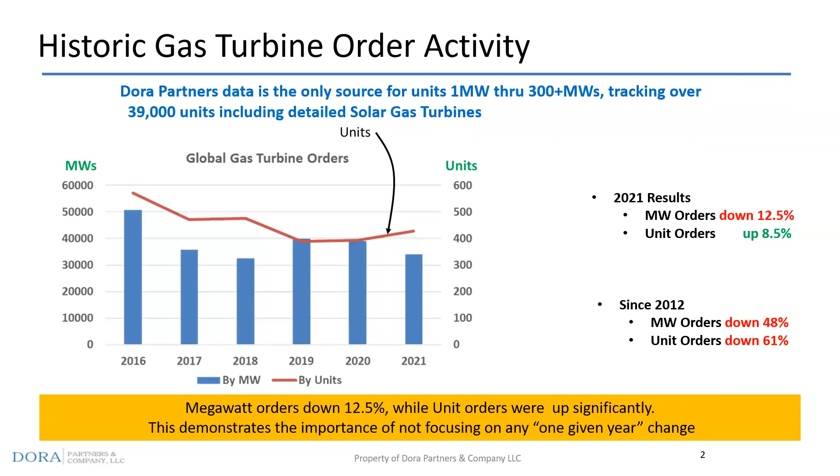I always think it's important to see which engines have had the most success, and it goes without saying that the LM2500 Plus continues to be the strongest gas turbine in the aeroderivative world and has been for a very long time. The LM2500 Plus has captured 33.3% of the market over the last 5 years, including Russian engines. A very strong gas turbine in the marketplace, with a compound annual growth rate of about 3.1% over that 5-year period. There are other engines that have done reasonably well, but I just wanted to highlight that.

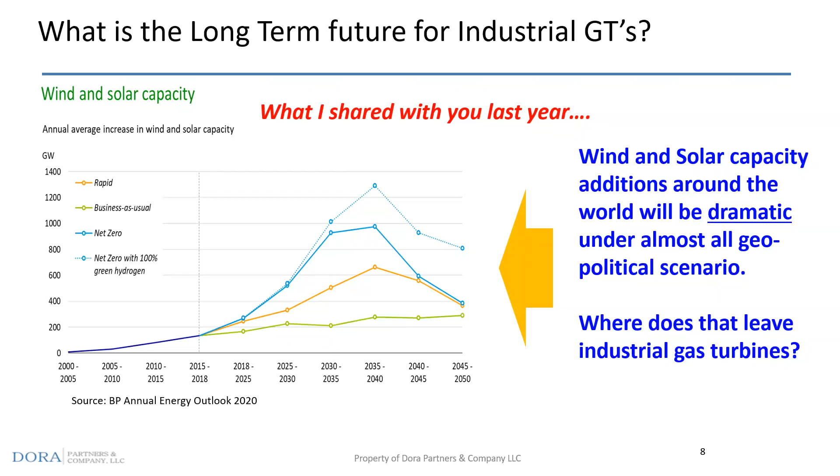So where is it? Hydrogen, in my opinion, is what I call the other natural gas. Now, is it a market that's going to grow rapidly? Absolutely not. Is it going to overwhelm the world over the next 10 years? Absolutely not. Fossil fuels will play a strong role for the next 10 to 15 years, without a doubt. But there are underlying activities that are very strong in terms of the utilization of hydrogen as a fuel.

You can see that the amount of electrolyzer installations planned or announced, converting water to hydrogen, represents a huge amount of activity around the world over the next 10 years. And if you look at factual activity, there's already 389 hydrogen development projects under construction, and another 489 projects in the feasibility or concept stage.

And 50 of the projects anticipate using ammonia as the final fuel selected. So it would be very unwise - and I know all of the gas turbine OEMs in the world are looking hard at the use of hydrogen and ammonia as a fuel. Maybe not for tomorrow, but over the long run, it would be very unwise to dismiss hydrogen. Obviously there are a lot of challenges over the next 25 years to get from point A to point B in terms of its utilization.

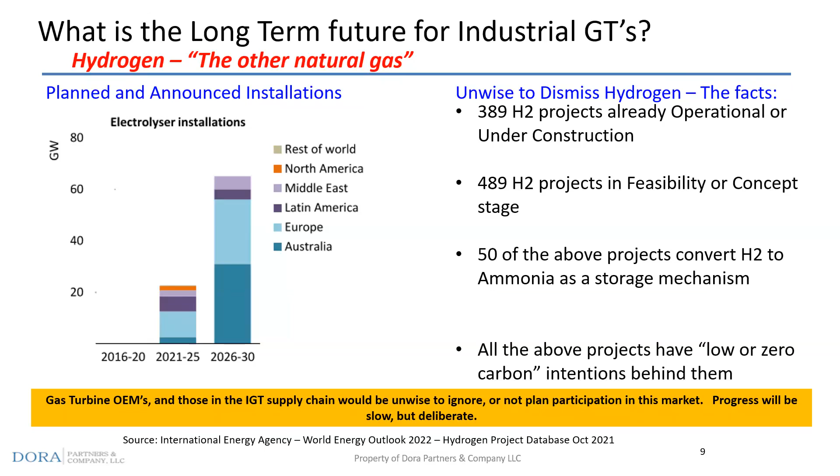So in summary, orders for gas turbines on a quantity basis were up, but down on megawatts. Aeroderivatives and small gas turbines did reasonably well, but I expect megawatt recovery will be coming in the next year and the coming years. The GE Baker Hughes team maintains a strong aeroderivative market share with the LM2500 Plus as one of the most popular gas turbine models ever manufactured.

LM6000 recovered its presence in 2021 despite very strong popularity of the Siemens SGT 800. The LM9000 has good long-term potential, but we're unsure what will be happening given the current conditions in Russia.

Long-term order activity is down, but there is long-term potential for gas turbines with fossil fuels and with hydrogen, ammonia, and methanol. And I believe those three fuels will be key to extending gas turbine life long after Mark and I are gone.

Renewable energy capacity additions will be dramatic over the next 20 to 30 years under almost any foreseeable scenario, and gas turbines will have a role to play. LNG expansion and a shorter term response to fossil fuel dependence on Russia may also improve gas turbine activity in the next 1 to 5 years.

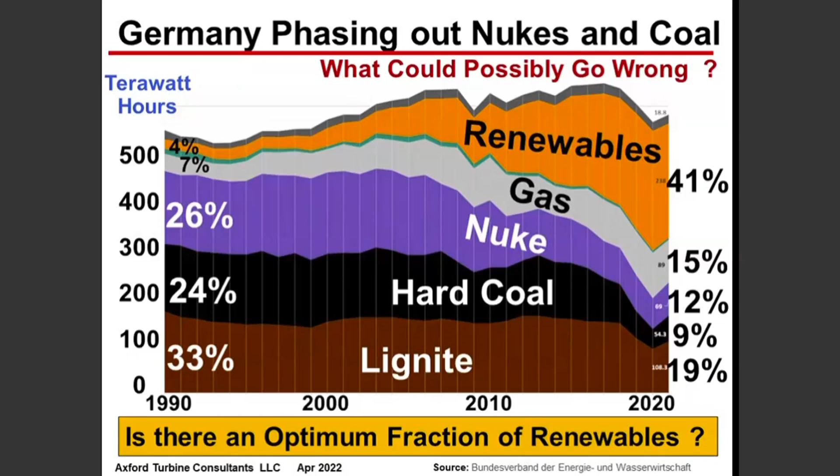Two big questions are: one, can Germany keep the grid stable during an extended period, like winter, of low wind or low solar? And two, will spot LNG be available at any price, say $40 a million BTU when needed? Say 65% renewable energy - what could possibly go wrong? Germany is betting big on wind to replace its coal and nukes, so their wind power must be doubled. Many experts worry that attempting to operate a large grid with 65% renewable energy is just too risky. The chance of a grid outage is too high.

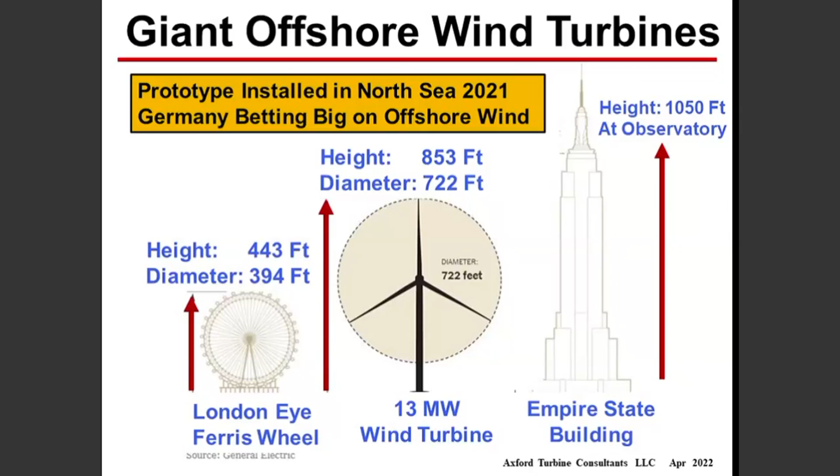Interesting to note, during 2021, RWE, one of Germany's largest electric utilities, purchased 11 GE LM2500 Express gensets for balancing power.

The big offshore wind markets in the US are in New England and New York State. Generous subsidies are being offered for Atlantic wind projects. The North Sea is ground zero for offshore wind in Europe, mainly for the UK and Germany.

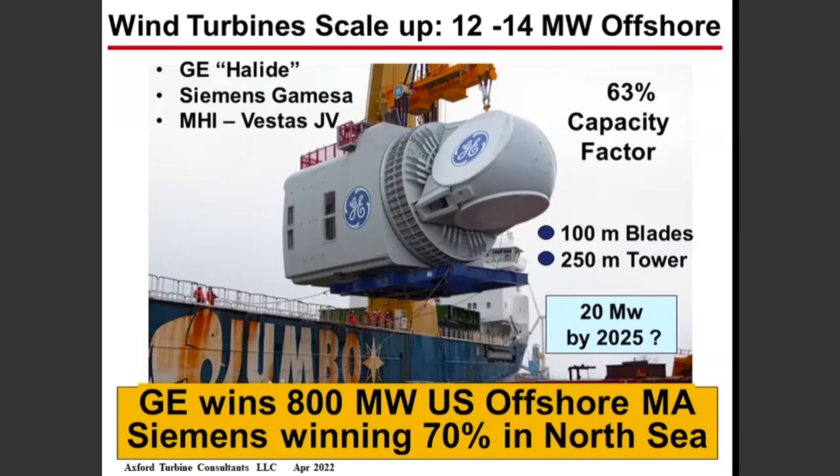Wind turbines are getting bigger and taller. There is some technical economy of scale, but construction and maintenance offshore is very expensive. But no problem, just raise the subsidy and add it to the price of electricity.

So let's circle back to gas turbines. We'll talk about heavy frame gas turbines and aeroderivative. Then let's review the lessons learned from the Texas storm of February 2021. Then on to batteries, lithium, electric cars and Tesla, hydrogen, carbon capture, and a forecast for 2022. 25 more slides, 25 more minutes. Pay attention, there might be a test at the end.

2021 was a tough year for the heavy frame division of General Electric. GE sold only one frame gas turbine in the USA, and GE would have lost its worldwide number one market share position to Siemens without the huge influx of orders for LM2500 and LM6000 gas turbines.

In this data summary, all aeroderivative orders for 2021 are shown. I've highlighted the LM2500 and LM6000 turbines. Also note, most of the Siemens aero orders were for the Trent and the trailer-mounted A45. These models were discontinued by Siemens later in the year, so you might say that Siemens had a clearance sale.

Want to know why GE sold so many aeroderivatives in 2021? I know why. It was fear. Utility executives all over the country, all over the world, saw what happened to Texas during February of 2021. And in a quiet moment, when no one was listening, they said to themselves, that could have been us.

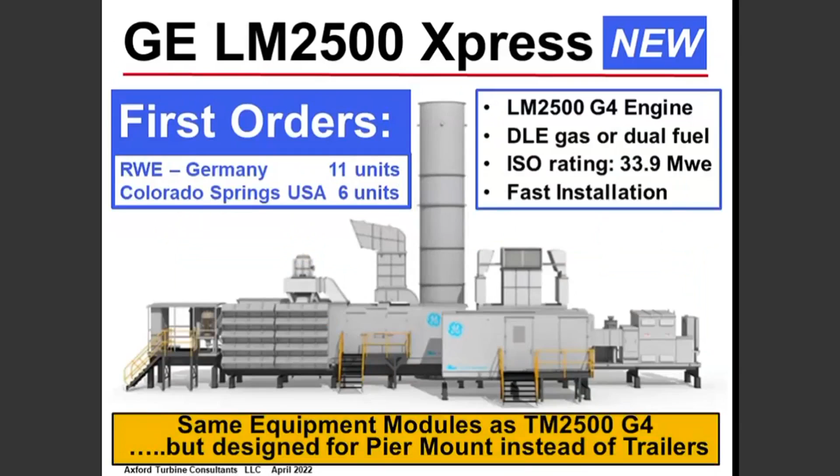Are you familiar with the LM2500 Express? It's a new product at GE. Think of it as a trailer-mounted LM2500, but instead of mounting all of the components onto wheels or onto a concrete slab, the foundation is set on simplified piers. The Express is less expensive to manufacture than a TM, less expensive to install than a conventional unit, and if desired, it can be relocated, although not every month like a TM.

There were two important LM2500 Express wins for GE during 2021: 11 units for German utility RWE, and this will be the first Express installation. It goes online during 2022. Also 6 units for Colorado Springs Municipal Power installed at a coal plant site. That installation will happen during 2023.

Some other notable orders for GE aeroderivatives during 2021: a block of 10 LM6000s for TVA in Tennessee, and some trailer-mounted 2500s for sites in Louisiana and California. The California win might be the last gas turbines ever shipped to California until the next crisis, but it made me proud to see California turn to GE when the chips were down, and GE delivered on time.

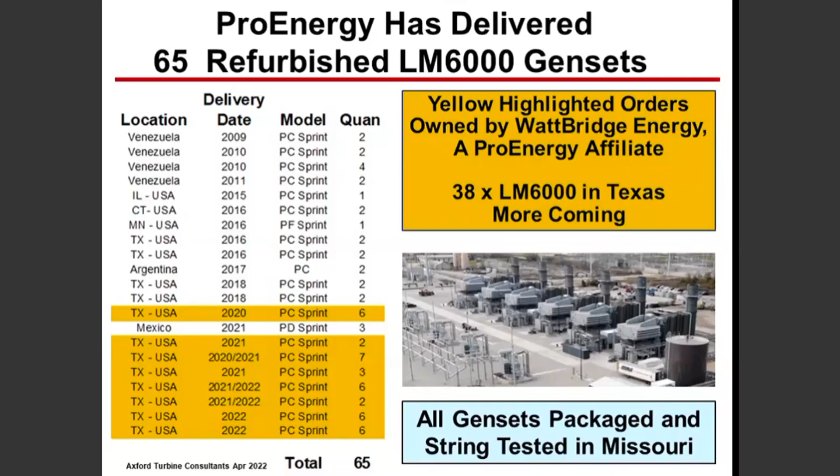After delivering 8 LM6000 peakers to customers in Texas, ProEnergy created WattBridge to own and operate peaking plants in the ERCOT deregulated market. Highlighted above are the 38 LM6000 units that Wattbridge has in service or under construction in Texas. Pro Energy will ship more LM6000 packages to Wattbridge during 2023, and this is now the largest LM6000 fleet worldwide.

A brief call out to Wärtsilä, not part of the gas turbine business, but a feisty competitor. Wärtsilä had a respectable year in North America, bagging orders in Omaha, Ontario, Canada, and Mexico. But noteworthy, Wärtsilä has invented a new business, selling packaged lithium-ion battery storage modules in a joint venture with Hyundai. Quite a unique supplement to their large bore engine business. File this one under the odd couple, but don't laugh, they're getting orders.

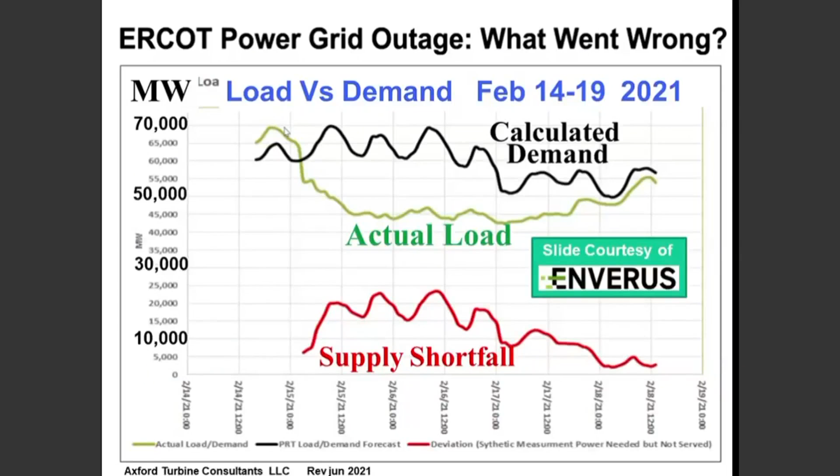And now dial back to the winter of 2021 in Texas. You saw it on TV. There were 3 days of rolling blackouts across the state. ERCOT fell short of demand by 20,000 megawatts. Oops.

Of course, there was a witch hunt. Every politician twisted the story to assign blame elsewhere. Choose the devil you hate the most.

It was a nasty ice storm. Technicians could not get to power plant sites with all the roads glazed over. And at the end, most of the ERCOT board was fired. The CEO resigned. Penalties were established going forward for lack of proper winterization. And the natural gas supplies for power plants were fortified and protected.

February 2022 was better. Texas had a normal winter. There were no major power interruptions. We got lucky. And the politicians proclaimed themselves genius.

The interim CEO at ERCOT today is Brad Jones. He has roots in ERCOT and was brought in as a steady hand to get things in order. Brad spearheaded the winterization program after taking the job following the storm. ERCOT is adding a lot of battery storage and has enabled wires companies to own emergency generation at key substations. At least 6 TM2500s are now installed at substations in and around Houston.

Brad also thinks there's an opportunity for crypto mining in West Texas using surplus wind from late night. The megawatt load from crypto can be disconnected when demand or price is high. I'm not a big fan of crypto, but it has one positive attribute for sure: no subsidies are required, at least not for now.

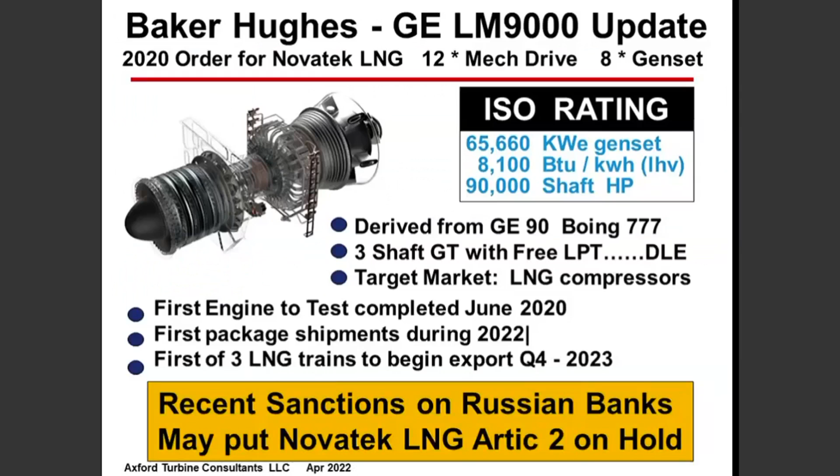The big headline from Baker Hughes in 2020 was the first LM9000 order: 12 compressor sets and 8 generator sets for an LNG complex in Siberia. Bad news now with the Russian invasion of Ukraine. It looks like sanctions might put a halt to this project. How could anybody have planned for this? Would it even have been possible to get political risk insurance for a project in Siberia?

Another sad LNG story, this one from Canada with 8 LMS100 compressor sets. Not sure if some or all of the turbines were delivered to the site, but the construction by Fluor was approximately 50% complete when investors pulled the plug during mid-2021. The cost of the gas feedstock and delivering LNG into Asia lost its economic viability during the construction period. If they could have held on till March of 2022, this story might have ended differently. The likelihood of resuming construction is minuscule.

Projects with LNG are risky. Who would have thought this project could fail after coming so far? But on a positive note, there are 7 major LNG plants in the US running flat out today. Most LNG is delivered under long-term contracts to Europe and Asia. Spot prices peaked during the Russian invasion at over $40 a million BTU.

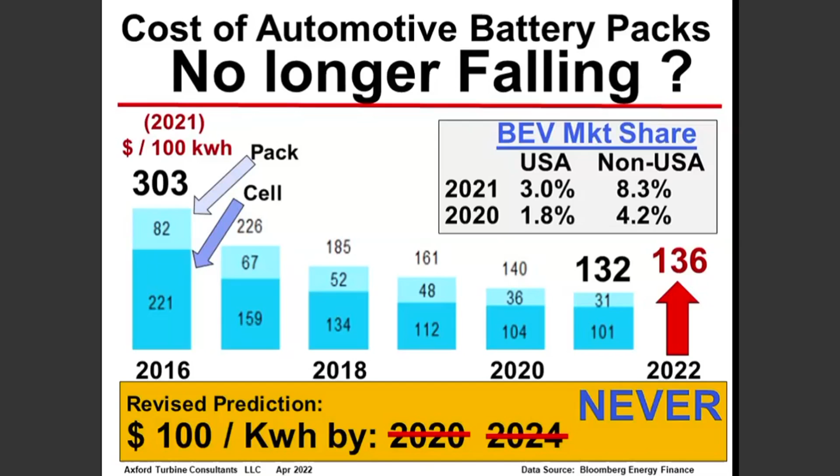The cost curve leveled out in 2021, and in 2022, we're now expecting an increase in the cost of an automotive battery pack. This is primarily because of higher prices for lithium and nickel. We may never see a $100 battery pack. The price of lithium has gone up by a factor of 10 during the last 15 months.

We know where the lithium deposits are located, but opening new mines and refining plants takes time and large capital investment. China has ramped up production of electric cars, causing a lithium supply deficit. For 2022, the deficit is about 26,000 tons, but will grow to 300,000 tons by 2030. Lithium cost is driving up the price of all electric cars.

You'll hear people say China has all the lithium. Not true. China has ample supplies of lithium, but Australia and Chile have the big mines. Raw lithium is not the problem.

To make batteries, lithium must first be refined to produce lithium carbonate. China has the refineries and the battery pack production lines. Less than 20 years ago, the US was dependent on imported oil. Then the US fracking revolution created an abundant supply of oil and gas. North America has only minor deposits of lithium, while China has large reserves of lithium but limited supplies of oil and gas. So it's logical for China's energy policy to favor lithium-ion batteries and electric cars. But with China's grip on the production of battery packs for the foreseeable future, is it wise for the US to be subsidizing electric cars?

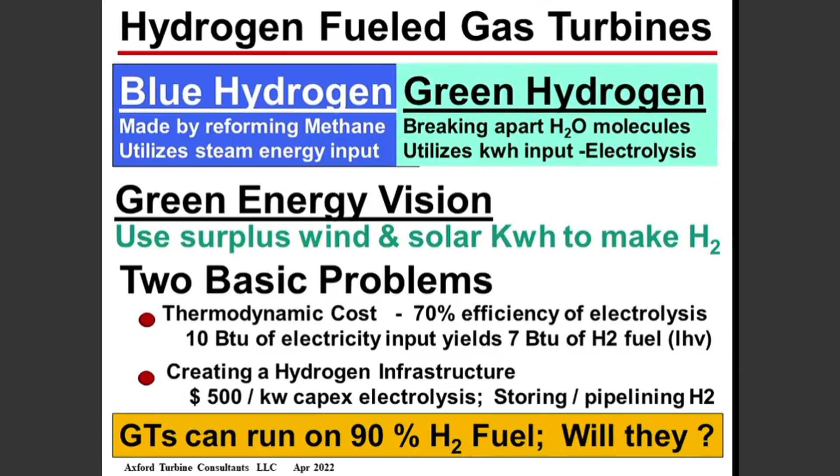Last year, I walked you through the blue hydrogen, green hydrogen scenarios. In short, producing green hydrogen is much more expensive, but green hydrogen brings joy to the Green New Deal crowd because it does not utilize methane as a feedstock. Running turbines on hydrogen has become the new mania. It's technically feasible, we know how to do it, but it's not economically feasible. Tony and I disagree on the outlook for hydrogen. There are dozens of ongoing projects and testing programs for hydrogen, but in my judgment, hydrogen will not become a mainstream fuel for gas turbines. Perhaps a niche market will evolve for blending 5 to 10% hydrogen into the gas supply in selected regional markets.

Removing CO2 from the exhaust stream is 80-year-old technology using an amine absorption system. It's 92% effective, but too expensive. Exxon is promoting new technology for carbon capture and storage. They're investing $3 billion of shareholder money on this idea. It has not been very well received by opponents who prefer that oil and gas not be produced at all. I have trouble following this logic. If natural gas can be produced and combusted with carbon capture, why should it not be used as an economical fuel?

Before I go, I wanted to recommend a book for vacation reading, if anyone still gets vacation. The book Unsettled by Steven Koonin, who served in the Obama Department of Energy, talks about climate change and global warming, but it's a perspective different than what you might have seen. There's lots of charts, graphs, and data, and some of the ideas put forward you might not agree with. Others you will. That's why it's called Unsettled. So keep that in the back of your head.

Now let's see what we've got for a forecast going forward. I'll tell you what, I didn't forecast oil at $100 a barrel, nor inflation at 8 to 10%, nor a war in Ukraine, but let's see how we do with gas turbines. I think 2022 will be another down year for large combined cycles. There are not a lot of active projects in the pipeline, and it appears that the United States and Europe will be moving into a recession. I'm projecting a 10% decline on an overall megawatt basis, and I think there's some momentum for smaller gas turbines to do better. Engines like the LM2500, LM6000, and the Siemens SGT 800 could have as good a year next year as this year, if some of the restrictions are released on oil and gas production orders.